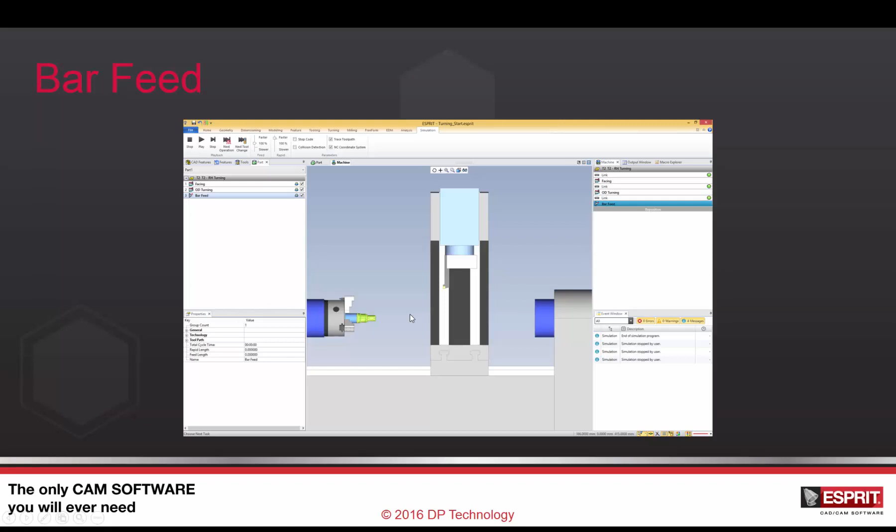Today I'm going to talk about the bar feed cycle. We've made some improvements on the bar feed cycle, both on the UI side and on the technical side. Okay, so let's switch to Esprit to see how it works.

So here in Esprit I have a simple part with just a facing and a roughing. I want to machine this part on my machine, but as you can see, my stock is still too much inside the spindle, so I cannot do that. So I will need to do a bar feed to pull my stock outside of the spindle.

In order to do that, I will select the first operation, right click and choose Insert Location. That means now everything I program will appear at this location. When it's done, I can add a bar feed cycle. Okay, so that's what I'm going to do.

We are inside the bar feed technology page now, and first we have an option called bar feed type. This option will help you select what type of bar feed you want to do. You have three possibilities: bar pull, bar feeder without stopper, or bar feeder with stopper. Obviously bar feeder without stopper or with stopper will not be available if you don't have a bar feeder on your machine, so you will not even be able to see them in the drop-down menu.

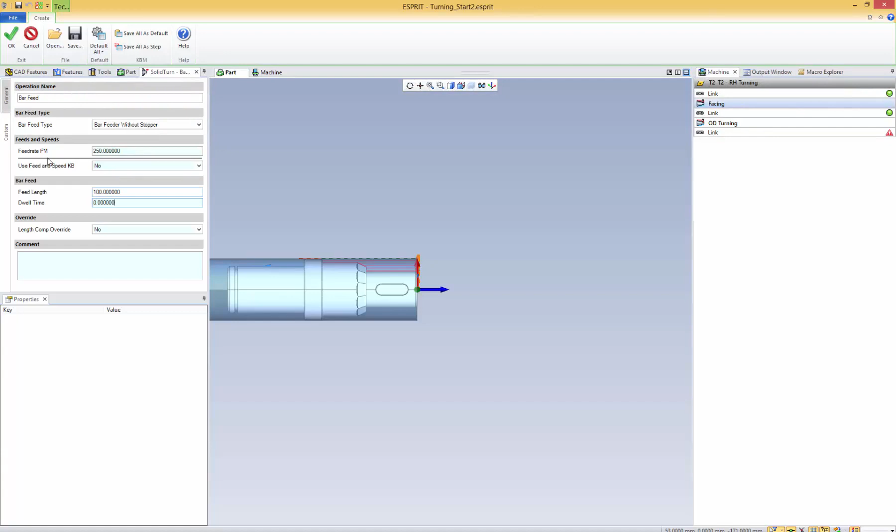Let's talk first about the bar feeder without stopper, which is the easiest option. Here I want to bar feed my part outside of the spindle, so I'm just going to set a feed length. In this scenario, I want to feed 100 millimeters outside the spindle, and I'm going to validate. We can see the bar feed appearing here, so I'm going to close my insert position and we're going to simulate.

Let's simulate right now. We can see that the spindle unclamps, then we have the bar feed of 100 millimeters, then we clamp again, and then we have all the operations. So that was for the bar feed without stopper, which was the easiest one.

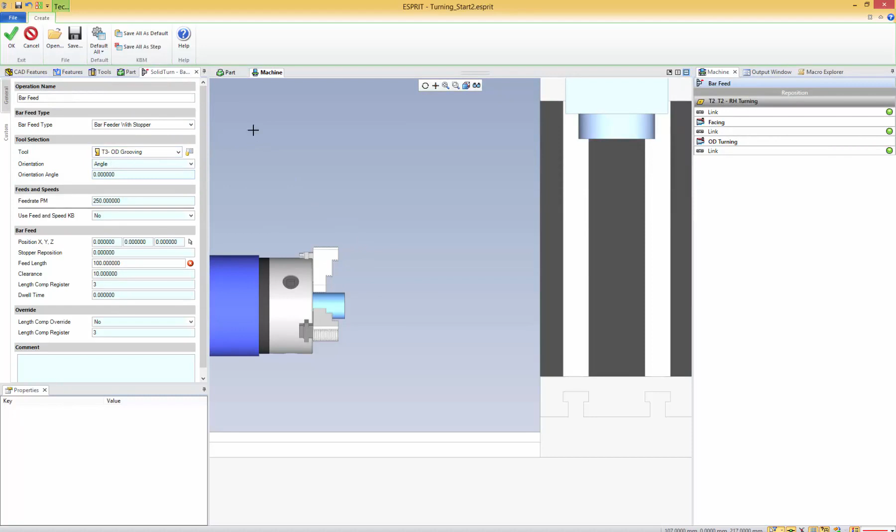Now let's switch to the bar feed with stopper. Here you see we have a few more options. I'm going to hide this right now. The first thing you want to set is a tool, so you can choose to stop the bar with the tool. Here I'm going to set a grooving tool. In the part view you will be able to see your tool, and also the position that you set here. So that's one cool thing.

Here I'm going to do the simple thing and set the position so that the feed length and the position match. You can notice there is a slight difference. This is because my stock is 2 millimeters offset on this face, so I have a stock that is slightly bigger by 2 millimeters. That's why I have a small difference here.

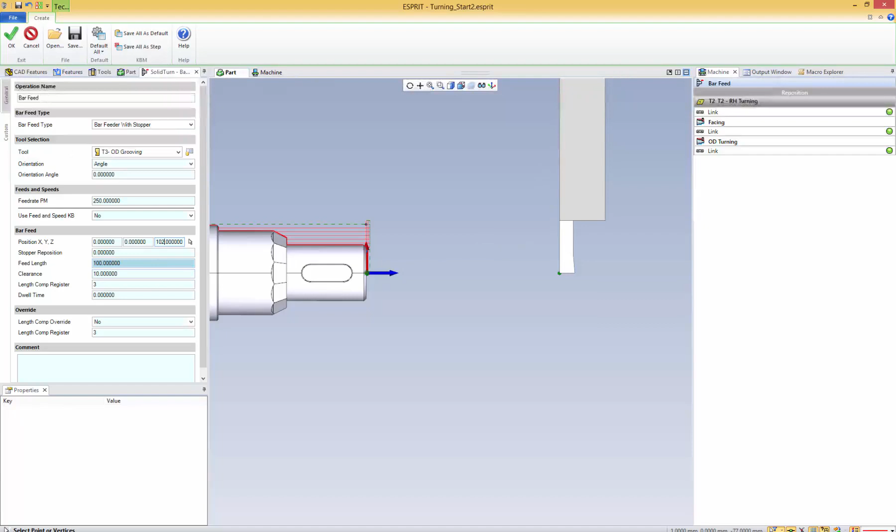So how does the bar feed know that? It's easy actually. The bar feed will automatically calculate when the feed will enter in collision with the tool, and that's when it will automatically stop. Let's see that in the simulation right now. My tool comes into position, then unclamp, then the feed, and then it stops here.

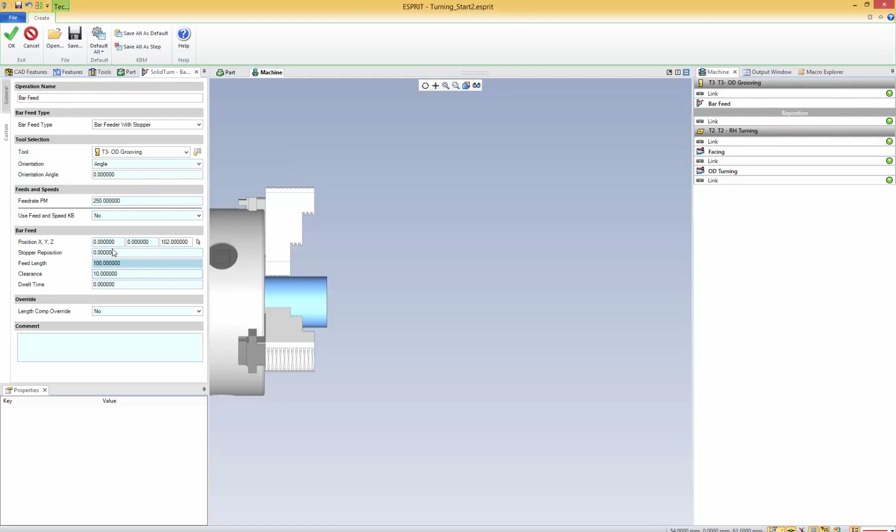Then I have a retract. I forgot to talk about it, but this retract is the clearance that you can set here, and then the tool goes back. So this was the easy setting. Now obviously when you do that, you don't want to enter in collision with your tool at this position because there is a risk of breaking the tool.

So what you will usually do is change the position so that the feed will encounter the tool on the shank here, and you have no risk of breaking the tool. Because it's a collision-based detection, it doesn't cause any problem. You could even choose to add an angle here, and the collision will be detected the same way. Let's add a 45-degree angle, and you can see now the feed length is calculated automatically.

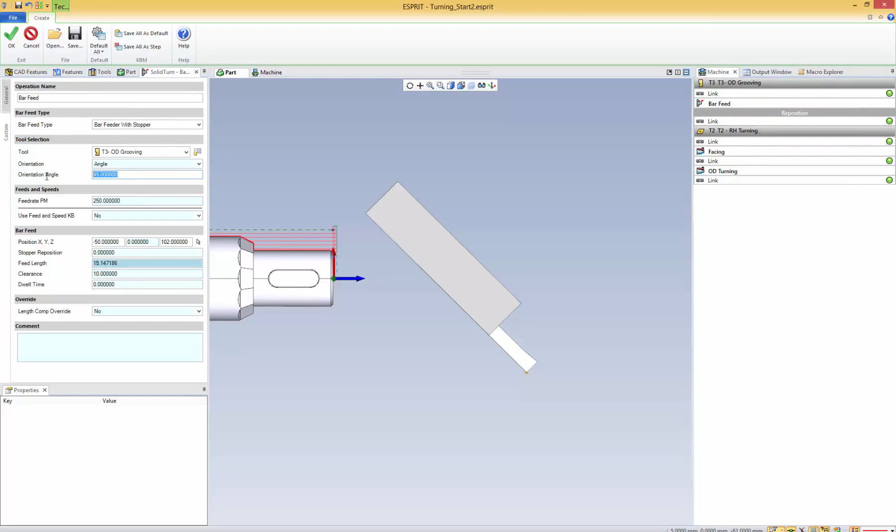So now I just did an easy feed with my stopper, but I don't reposition my bar. Usually what you want to do with a stopper is feed out a little bit more, and then have the stopper reposition the bar at the proper location. So I'm setting the tool here, then the bar will feed up to the point where it collides with the tool, and then the tool will move forward and bring the bar back to the correct position.

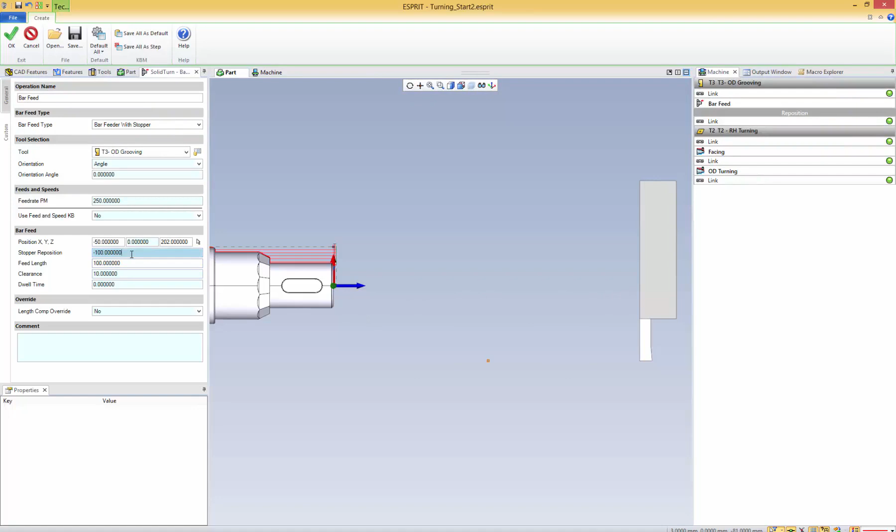What you want to do is set the tool position, and then set the actual feed length that you want. Automatically you see the stopper reposition is calculated. It means that the tool will bring the bar back 100 millimeters. Let's see that in simulation.

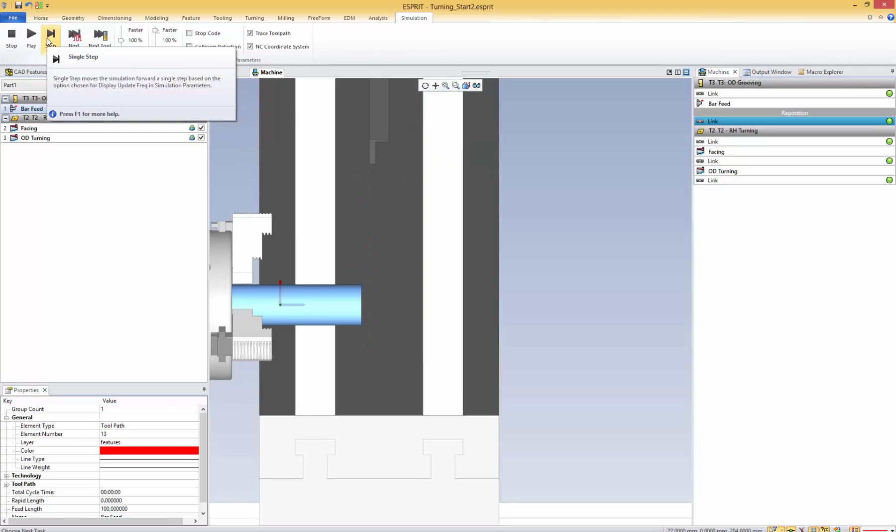My tool goes into position, then we have the feed until the collision occurs, then we bring the bar back to the correct location, then we clamp, and then the tool goes 10 millimeters of clearance, and then it goes back to the home position.

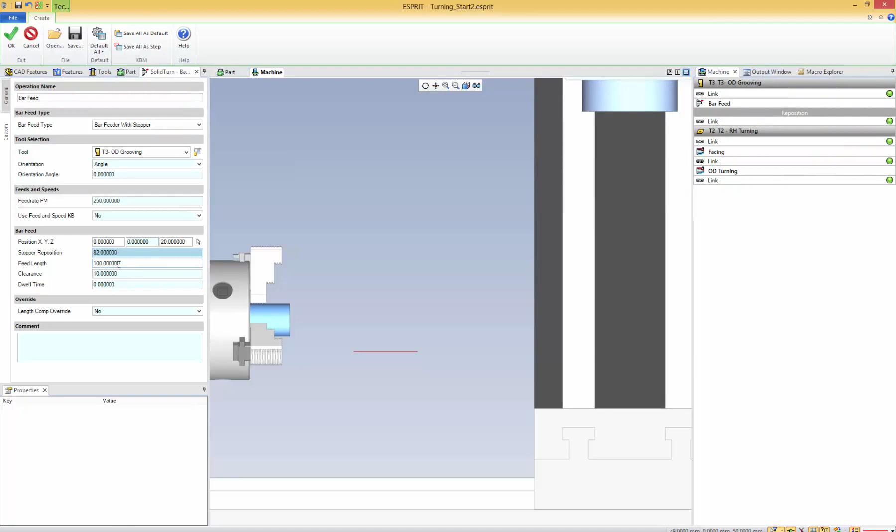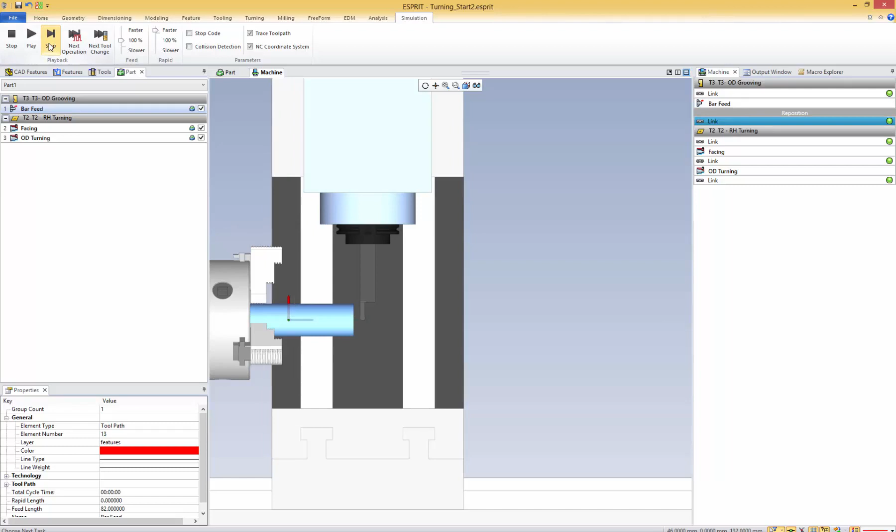Some users also want to do it the other way around. They will decide to clamp near the part, like 20 millimeters from the part, and they still want a feed of 100 millimeters. That means the stopper reposition will now be a positive value, and we can see that in simulation. They bring the tool close to the part, then bring the bar out a little bit, and then they can control how much it goes out this way. Then we clamp, we still have the clearance, and the tool goes back.

Okay, so that's about it for the bar feed.